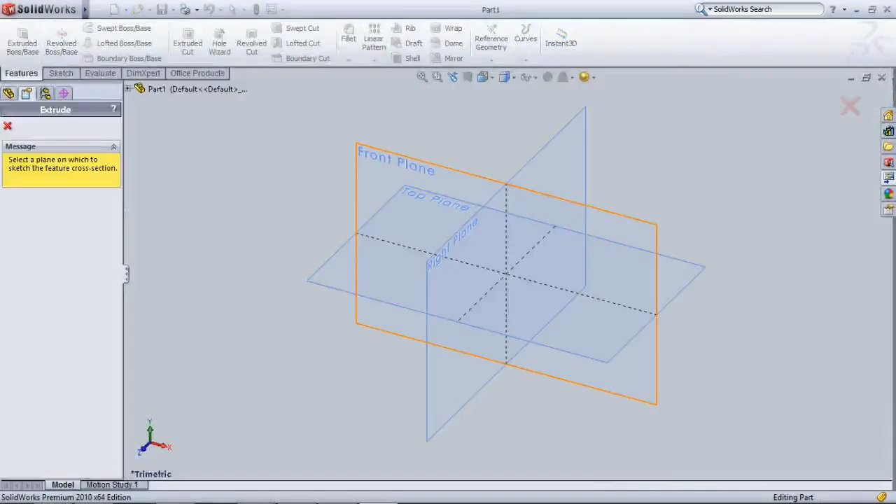For that, in SolidWorks, click New and do Part. Click the part icon, click OK. This will start to load a work area.

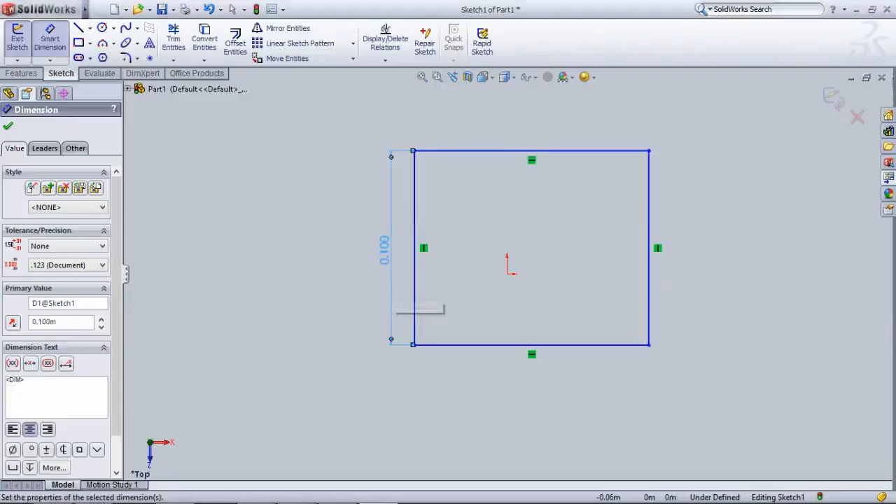Now it has got the work area. So click Extruded Boss and Base. Now you are prompted to get a plane. Which plane are you going to choose? Select the top plane.

In order to produce a top view of the plane, using the top view, I am going to extrude the material.

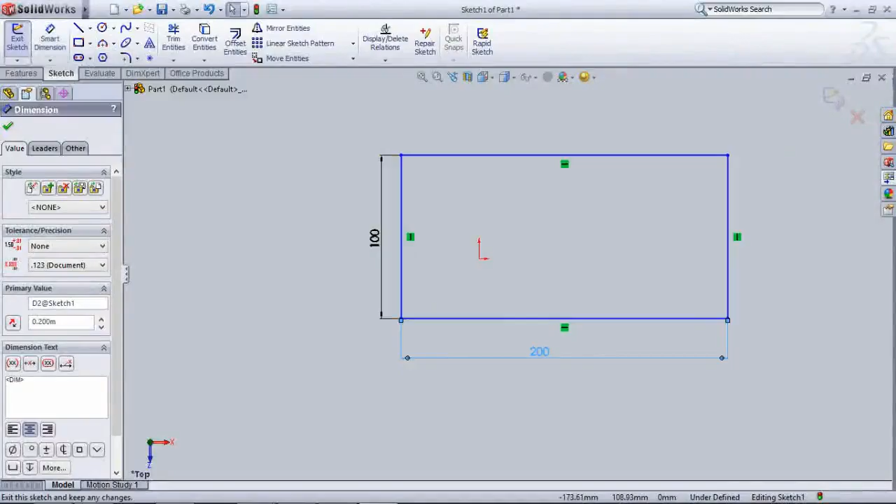Here the units are all in meters, so we can change it to millimeter as shown here. Now after changing these units, it is automatically changed, which you can see now.

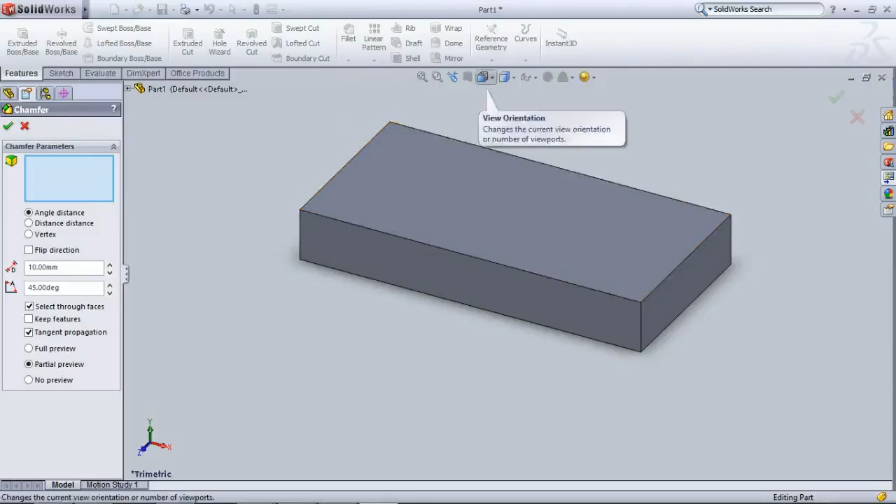Exit the sketch, click Exit Sketch button, then you are forwarded to that boss extrude operation. Just view in the left side panel here.

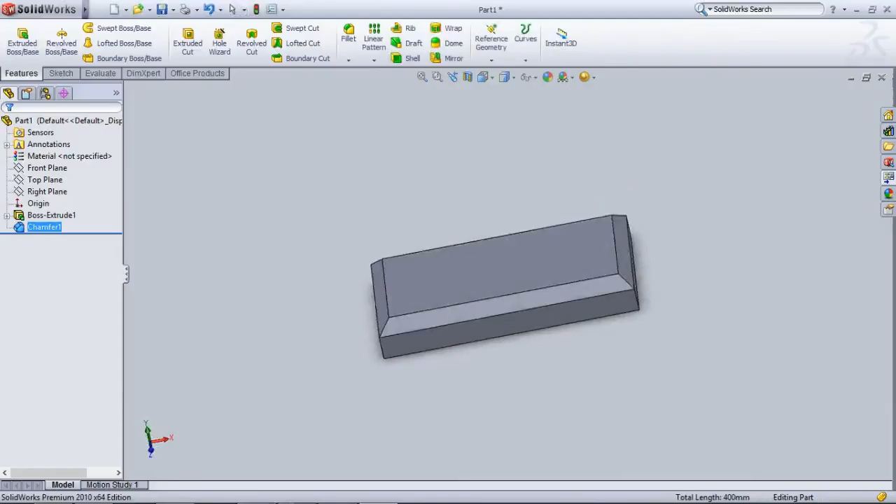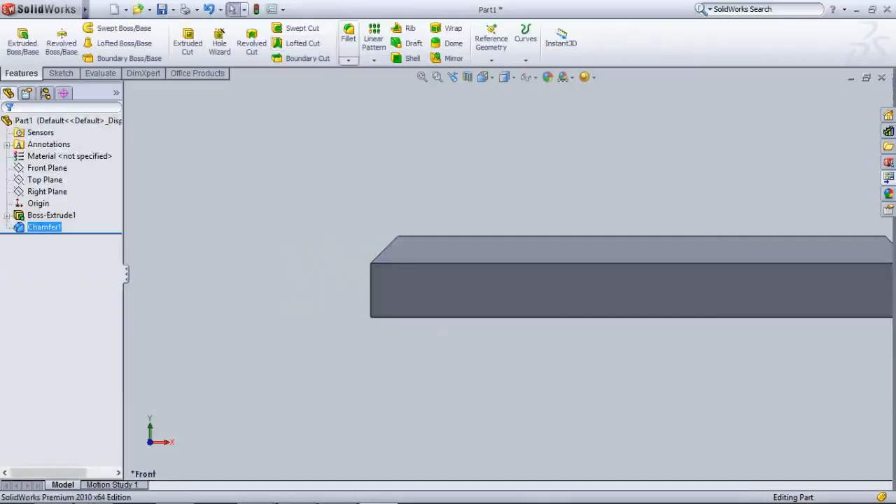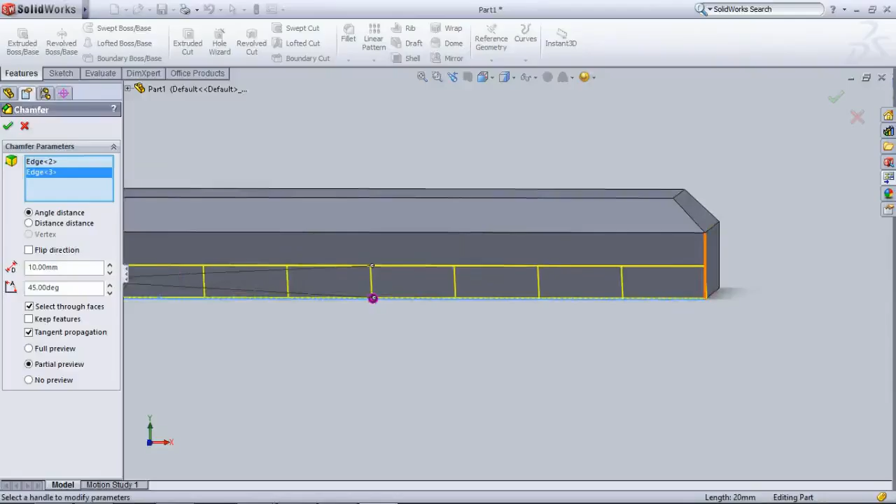You have to chamfer this material, since chamfering is required not only for the material looking good, the project looking good, but since when you are handling such material, the weight can be reduced using this chamfer. It will not only reduce the overall weight, but also save some more space. The chamfering makes the visual looking very good, and the material handling will be very easy.

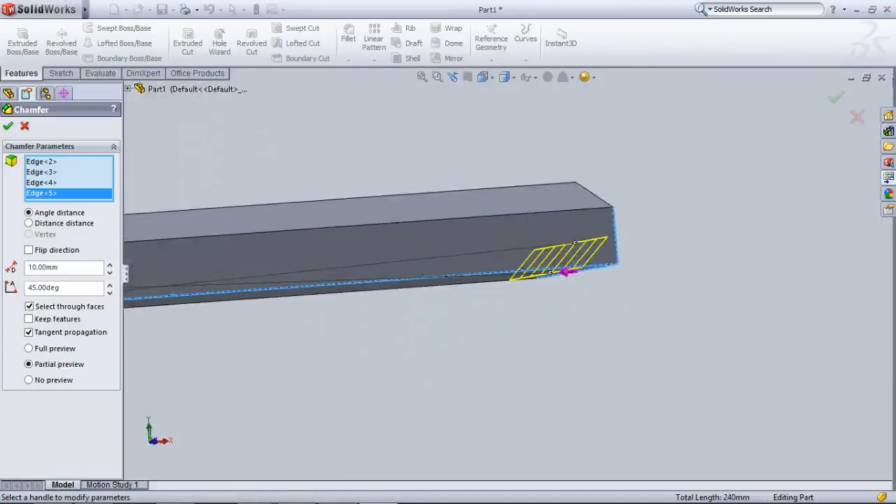Normally deburring means clearing the sharp edge after machining a component. For deburring we can choose the fillet command. Fillet means the edge will be arc, like it will be blend. Here the chamfer is done for the purpose of deburring.

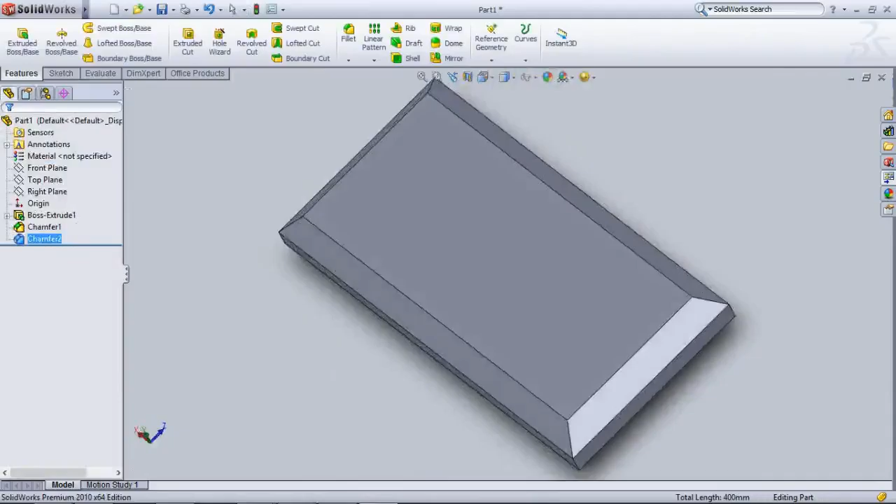Here I choose the chamfer as 10 by 10 and the degree as 45. Just you are seeing now how I am doing chamfering.

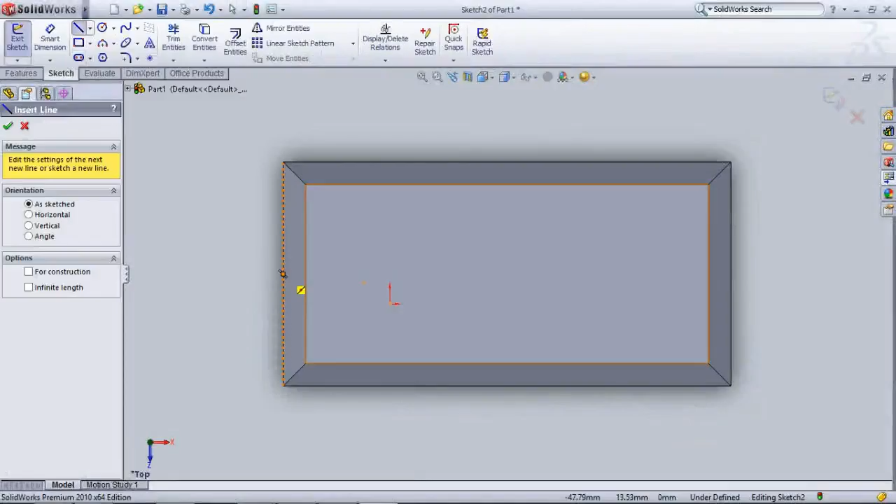Click the Extruded Cut. You are going to do an extruded cut, which means projecting the cut plane into the material. You can produce a cut hole. Here I am going to produce a cut hole by drawing the circle.

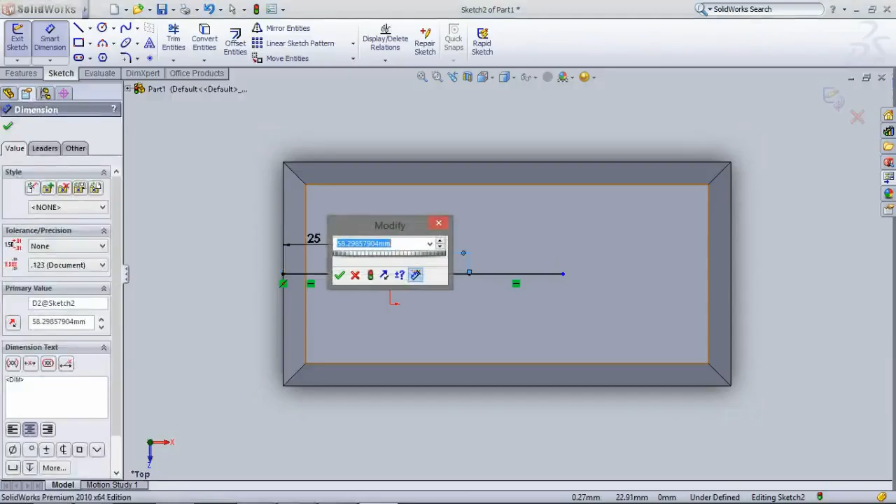Before drawing a circle, you just require a reference line. This reference line will be able to locate a coordinate or a point to measure or draw a circle.

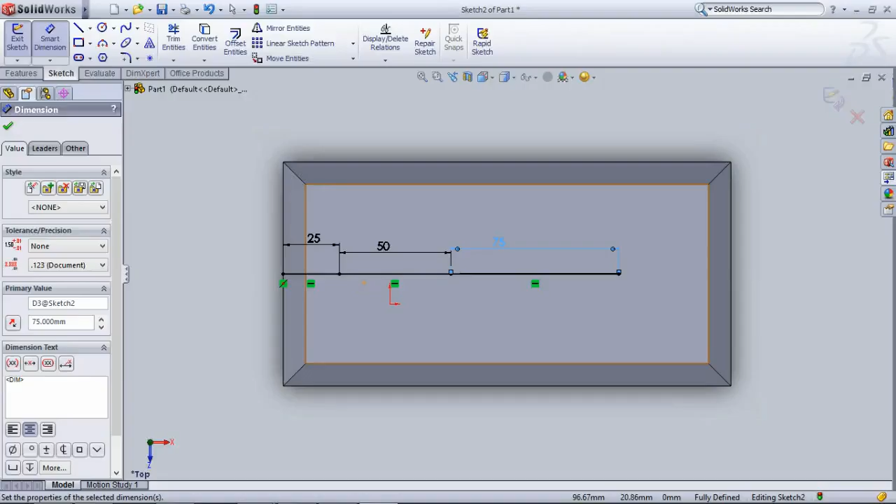So we can do it by taking a point command, by placing a reference point also you can do. But simply, I am choosing a line from the midpoint of one face, one edge, like you can see on the left side from the edge. I am choosing that edge midpoint as reference for doing a reference line, because all these circles will be on the same line, with center to center distance of 25, 50 and 75 as shown.

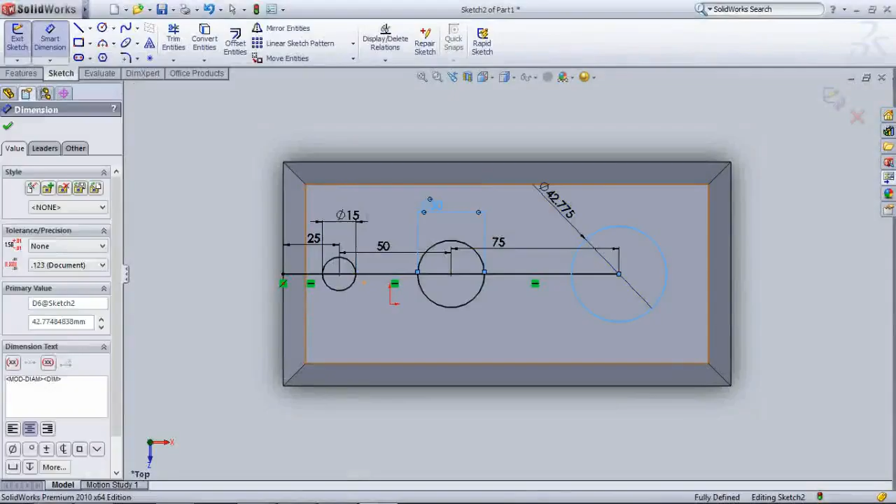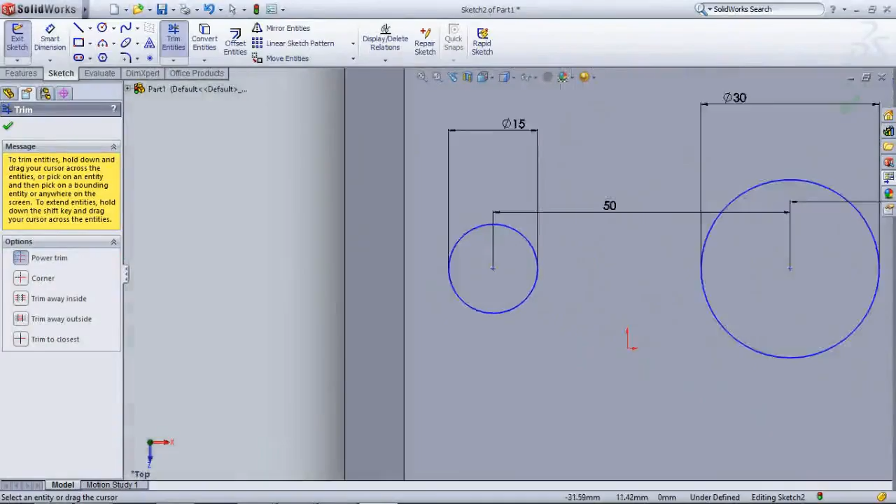I am showing here. Just do the circle and do a smart dimension by editing all the circle diameters. Then click the Trim Entities command, just trim or erase, like you can do easily. Just click and drag, all the lines will disappear and be deleted. If you want, you can undo by pressing Ctrl plus Z.

Just click Exit Sketch, you are now forwarded to Cut Extrude. Just choose Through All, because the application requires the extruded plane to go through all of that object here.

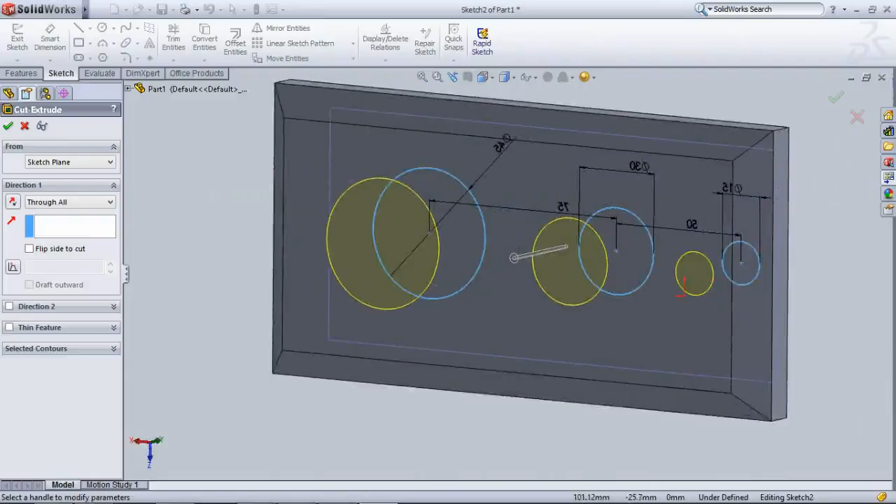So looking here, you are doing now a chamfering for this circle. I am choosing the chamfering as 5 mm. Hold the control key, select the edge of the circle, not the plane. You have to choose the circle edge and click OK. The chamfer will be done.

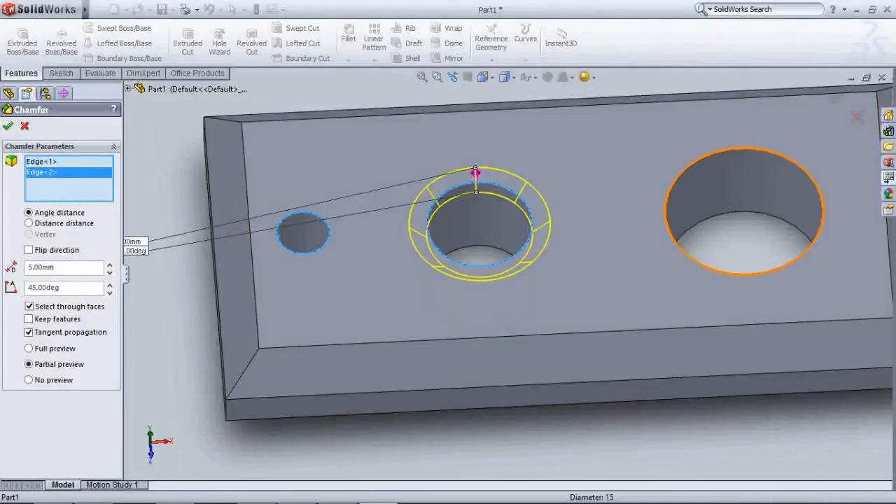You can rotate using the middle mouse button and see that. Just like here, I am taking the position. For that also I am doing the chamfer for the bottom side edge of the hole.

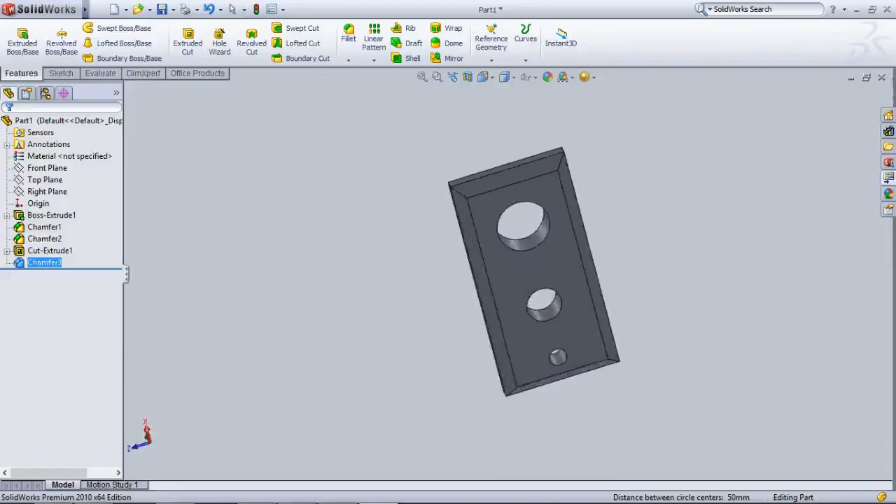Same chamfer, sorry, 0.5 mm, both sides 0.5 mm is required. All the edges will be 0.5. That face 5 mm chamfer I choose to locate a countersink screw.

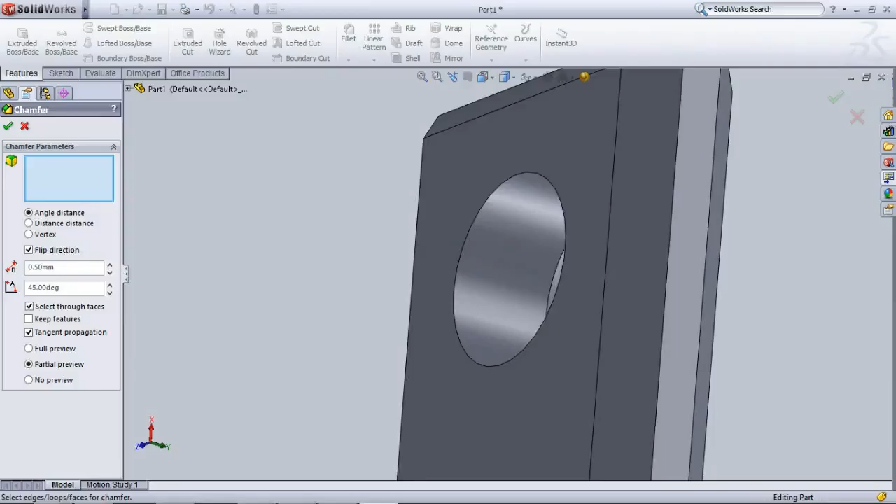Yeah, for this purpose a countersink screw will sit on a tapered chamfered extruded cone cut. The countersink screw will be fitted in here.

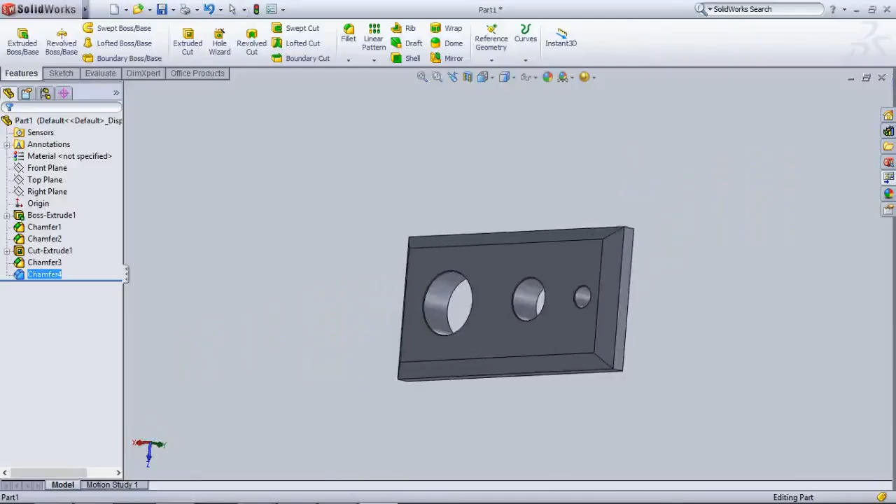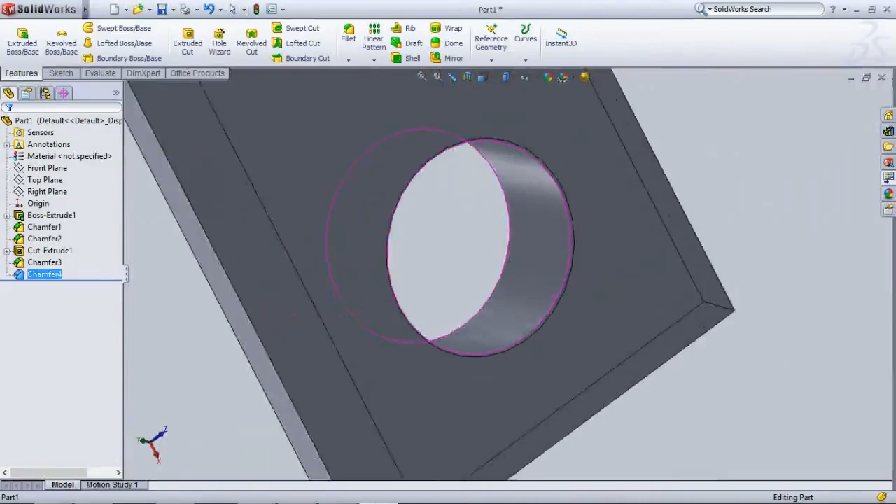For drilling, there will definitely be a sharp edge produced, because the material tears off and projects outside from the material. So you have to deburr for 0.5 mm. This material requires 0.5 mm to deburr all this projection, and due to the press force during drilling operation, those projections and sharp metal will be removed.

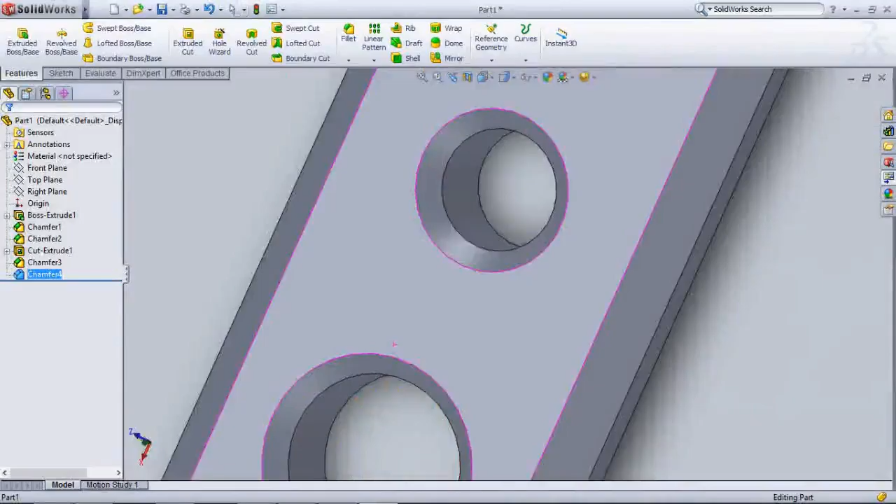So now, just after designing it, just save that as a part file. I am choosing the file name as base flat fixture plate. Yes, it is saved.

And now you have to ensure whether all the parameters you are choosing are correct. Normally, okay, no problem. Click save button and just open a new drawing or make a new drawing or assembly to create a drawing sheet.

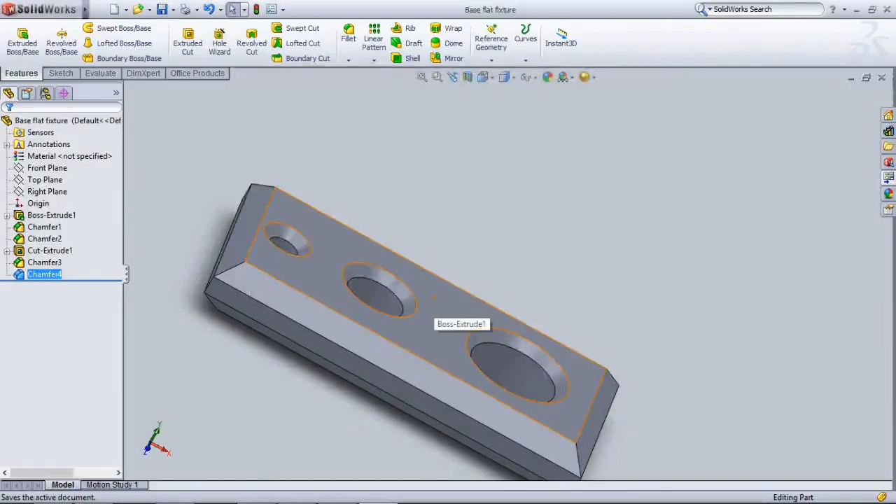You have to export this 3D object into a 2D or isometrical view in the drawing sheet for better understanding for a manufacturer. Here you can see in the nameplate, base flat fixture is the name that came. These parameters, you just double click and edit it, no problem.

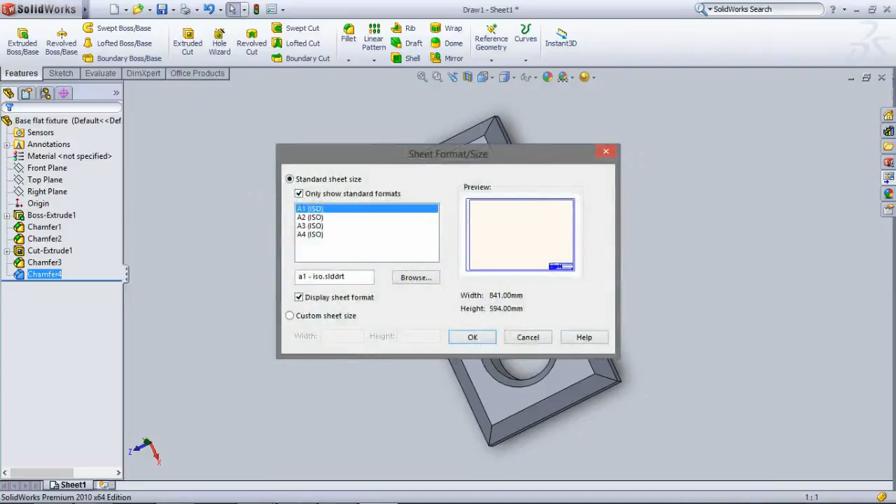Now I am simply showing you that the view palette is appearing on the right side. Just click and drag the views, whatever views are required. I am choosing top view, side view and the isometrical view.

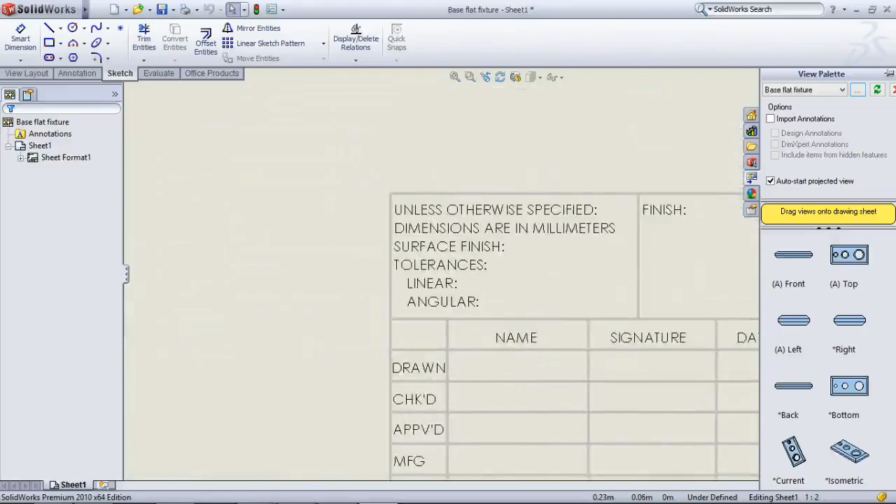So here a sectional view is required for the front elevation. For that purpose I am now going to delete that front elevation.